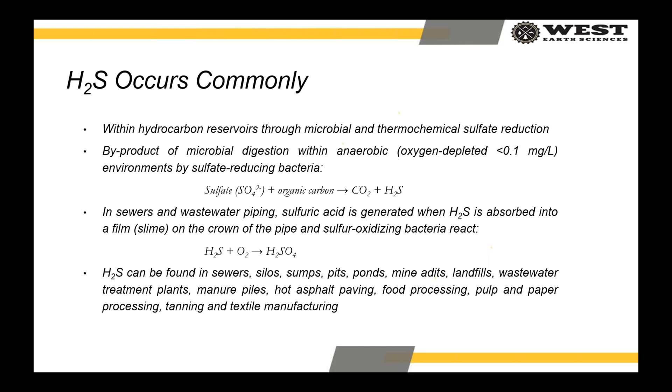So I took a look at the last number of years worth of incidents reported throughout North America, and fatalities in particular around H2S, to give you sort of an idea as to where it might occur. And so you see it doesn't really discriminate against a specific industry. So it can be found in agricultural or farming operations. It can be found within industrial operations. It can be found in rendering applications.

It's very commonly found in sewer applications, whether it's trenching, servicing, cleaning, obviously found in gas plant environments. There have been fatalities that have occurred just in restaurant operations where staff went down to clean out a sewer from a restaurant that was being problematic. You can see it in a variety of tannery operations and that type of thing.

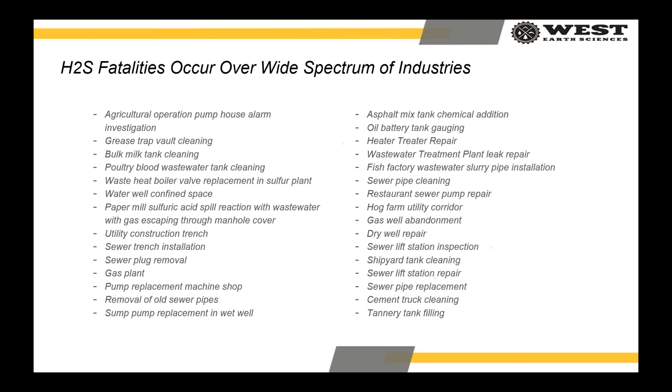So I'm not going to dwell on this list. And when you see the presentation in PDF, you'll get a sense that H2S doesn't really discriminate against a specific industry. So Hendrickson in 2004 did an assessment of about 7 years worth of reporting. So it was not just fatalities. Now, if I just go back to my list here, this is over the last 5 or 6 years in North America. Hendrickson did a pretty comprehensive analysis and published it in 2004. So he looked at 7 years of data.

And of course, in here are some lessons learned for us. So almost 50% of the fatalities really were employees in their first year of employment. And all of us know, as part of a comprehensive safety program, that the most dangerous time for safety is as a new employee performing a new task. So the fatalities were most common in waste management and natural gas processing. Poisoning was most common in sewerage, as well as more downstream in petroleum manufacturing.

And again, at the time, it didn't really look like it was biased towards a particular size of company. So even larger companies had a fairly high fatality rate compared to smaller companies. So it sort of highlights the importance of not making an assumption that if you're a particular size of company and you have a particular program that you can be immune to the risk associated with poisoning from H2S.

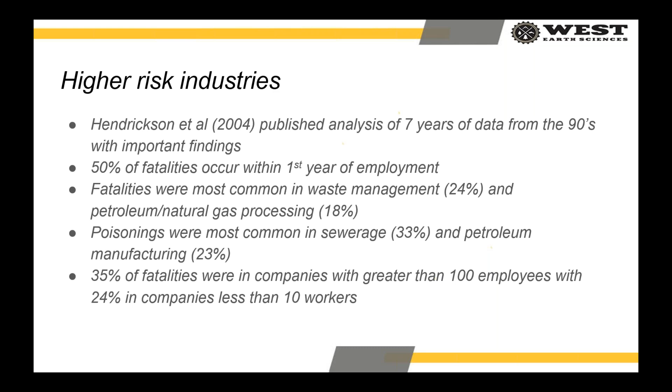So some of the important physical properties, and I'm sure there's a couple chemists on the call that understand this better than I, but it's colorless, it is flammable, and it's highly toxic. And it's of course denser than air. So you remember from your H2S lessons about don't head downwind, downhill in the event of a release or an alarm. So it's very important to understand that because of that density, it's really affected not only by where it's generated, but it's also very much affected by wind speed, changes in barometric pressure, and changes in the configuration of the workplace.

So some of the mining fatalities, if you go on the web and you scan some of the fatalities that have occurred, you'll see circumstances in which workers have gone into mine adits, confirmed that there was not an H2S risk, but during the time period that they were in that workspace, there would be a shift in the barometric pressure, a shift in the weather, and now you get H2S gas flushing through an area that had tested previously clean. So it's very important to understand the impact of denser than air and how it can mean a change in the H2S levels within a particular workplace.

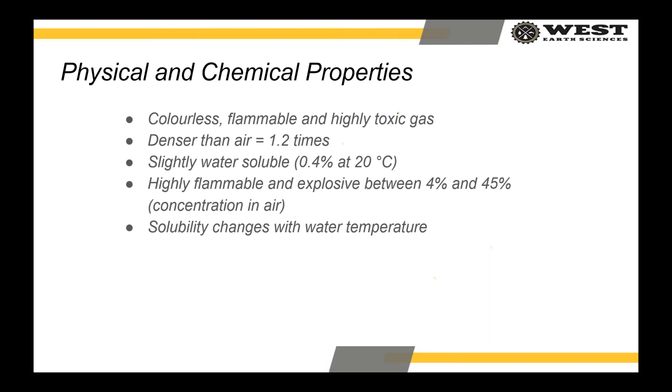Joe, can you see my arrow? Yes, we can. Yeah, very good.

So that affects whether at lower pH, maybe you're trying to remove it, you're trying to bubble it out as a dissolved gas, whereas at a higher pH, you might have to be treating it for the HS ion and use some chemistry. So really, it's important to understand that over a narrow range of pH, you might get quite a change in the behavior and availability of hydrogen sulfide.

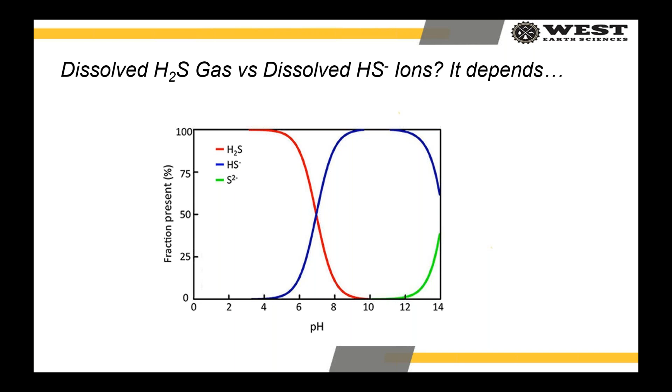So the availability of hydrogen sulfide, if it's a dissolved H2S gas in water, as we saw on this graph, at a lower pH, you get more H2S dissolved. That means at a lower pH, if the water is turbulent, then you might get more bubbling of H2S, making it available. Now, lowering the temperature increases the solubility. So a low temperature wastewater flow would have more milligrams of H2S available than at a higher temperature. And then finally, the turbulence of a flow really affects the amount of H2S that can be released.

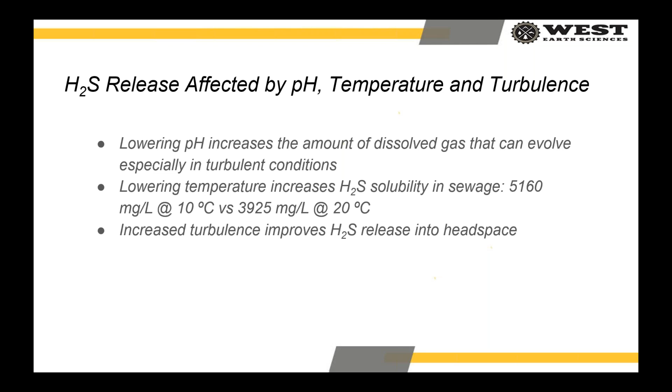So remember, I talked about one of the industry standards for design, and I'm just opening up the book right now, and it's basically 1989, ASCE produced a manual for sulfide in wastewater collection and treatment systems. And so I've excerpted from there an example of some of the types of flow that could cause the turbulence and accelerate the release of H2S.

And so you'll see a variety of configurations. These are biased towards sewerage type applications. But if you look at any industrial piping system, you'll see situations like this can also occur. And so if you have drop structures coming from a process wastewater, or you've got merging flows, all of those create conditions in which you might get H2S release.

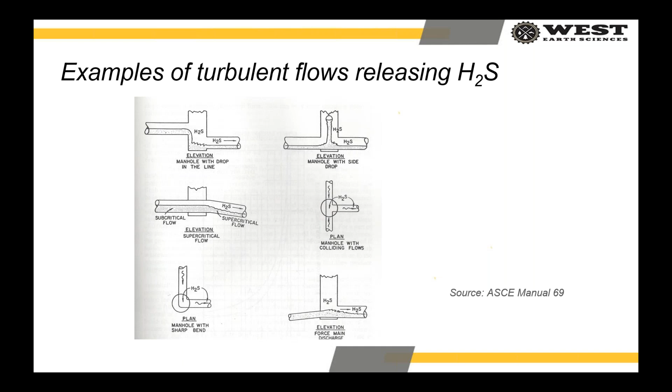And so there's been some good work done and research done, for example, in the city of Edmonton around the impact of major drop structures on the availability of H2S coming out of the water and into the headspace. So it's worthwhile thinking about what are the various action levels that might be in place that are important for the protection of infrastructure, protection of worker safety, and protection of the public.

H2S can be detected at a pretty low level. And I remember working at the Edmonton composter when we had basically a biobed system, sort of a bacterial system outside to treat trace levels of H2S that were coming out of the composting operation. And what we used to detect it was an odor panel, because we found people that could detect levels of H2S at levels that were below what you could measure analytically.

And so you can get an offensive smell at a concentration as low as 0.5 part per billion. So that factors into how much of a risk is there if you have an H2S issue. What's the risk of it becoming offensive and creating a problem for your neighbor or your worker? So always remember that the detection levels are very low. And that's a good thing, because of course the mortality associated with higher levels of H2S is extremely high. And so it's good that some can detect it at a level so low that you can barely measure it through an analytical process.

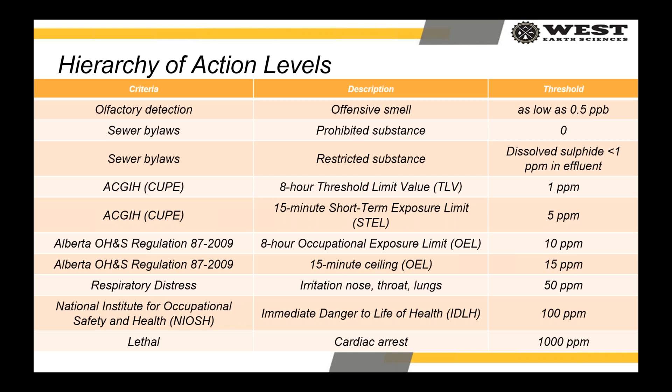So the key considerations for safety are make sure you identify the potential sources, especially organic or anaerobic digestion of organic matter. Think about the downstream conditions that can affect the state of H2S. So for example, if you have a digester discharge at a certain concentration of H2S and a certain equilibrium between the hydrogen sulfide ion versus the dissolved gas phase, and then you blend that stream with, say, a boiler blowdown of a varying pH, make sure you understand how that changes the availability of H2S. Also understand how upset conditions can disturb the equilibrium of the system.

Make sure you have adequate detection. Now, whether that's the workers with a portable device that they're using before they enter into a space that has the potential for having H2S in it, or online real-time monitors with alarms as well. So making a selection of the right detection equipment.

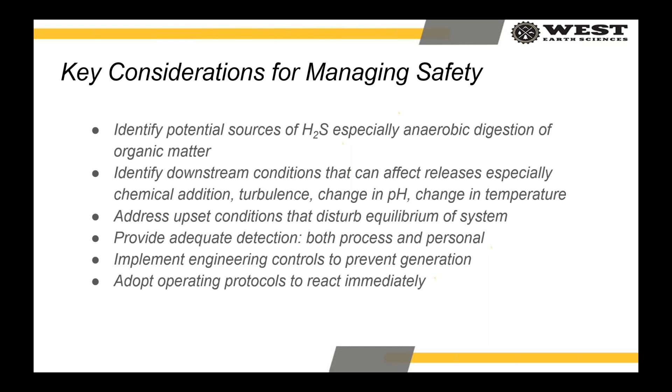And then, of course, and again, I'm preaching to the choir for many of you, the combination of engineering controls to prevent it from being generated. And that can be treatment associated with, for example, your wastewater treatment plant. And then also adopting the operating protocols so that you respond immediately to any circumstance in which there's an elevated H2S, especially with the potential for any worker exposure.

So the treatment options, moving on, really depend on your desired outcome. Are you focused on meeting effluent discharge criteria? So in other words, are you focused on achieving a bylaw, either a restriction or a prohibition? Are you worried about odor generation? I remember decades ago doing some air quality monitoring on one of the large regional wastewater lines because we were detecting odor in a regional line that was coming from one of the surrounding communities in the Calgary region.

Is it an occupational health and safety criteria that you're trying to achieve? And then finally, are you looking at the H2S control to prevent any damage to infrastructure, especially corrosion and degradation of piping systems? And so when it comes time to choosing the treatment technology, you have a variety of options. You can do physical, mechanical.

So in other words, if I've got H2S at a certain pH in a bubble form or dissolved form, am I going to go to some sort of physical process to get those bubbles out? Or am I going to go to a chemical process where I would add an oxidant of some type in order to get the H2S out? Or do I go to a biological process? Remember I talked about a few minutes ago, we used a biological process in the composter in Edmonton to take out any of the odorous compounds. So they were low concentration, but nonetheless still detectable by our odor panel. Or is it a combination of those three processes?

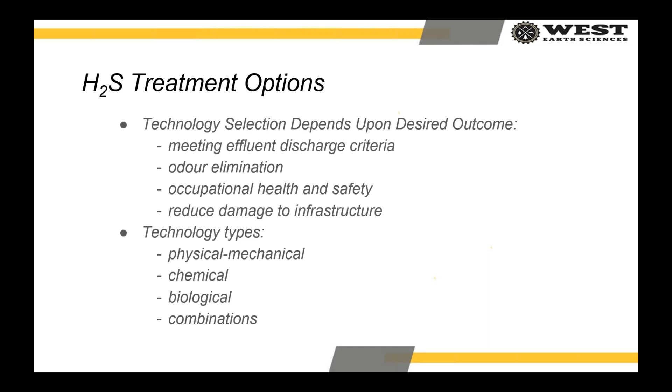Thankfully, I'm not going to go through all of these in a lot of detail on this call. But you can see there are a variety or family of treatment technologies that really are based on whether there's a high volume of flow, whether it's a water or air media that you're trying to treat, or whether there's a low volume of flow. And there are some examples that have been quite commonly shared around Western Canada.

I haven't seen the participants list as to whether there's anybody from Apache and Encana, for example, on the call. But an example of a conventional stripper is the DeBolt water treatment plant in northern British Columbia that was in place to remove H2S from formation water to make that water available for reuse in hydraulic fracturing operations. So that's an example of a type of technology that's really a physical combined with chemical process.

So there's a family of technologies that are available, and many of these, or all of these, used in Western North America. So the selection really comes down to an understanding of the chemistry, volumes, and the ultimate performance target. Some of the performance targets also relate to the perception of the end user.

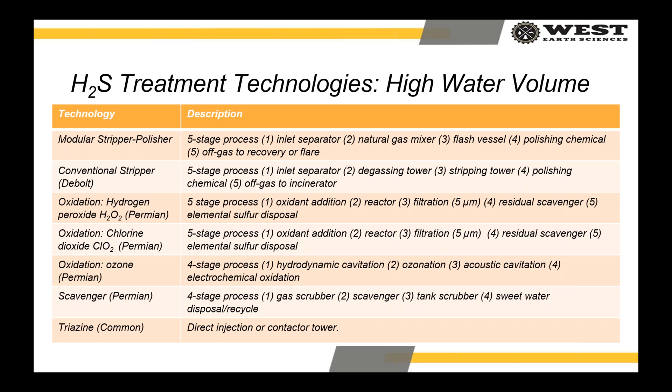So in looking at, for example, hydraulic fracturing water reuse applications, the service providers for the fracturing operations want to see H2S reduced to almost a non-detect level. And partly because of the concern around the perception of safety, and partly because of the need to protect the tubulars and equipment from any corrosion resulting from either an over or under treatment of the H2S problem.

If you go to some of the lower volume systems, and this is something that many of you that are in the municipal sector would be familiar with, you can go to a variety of technologies and chemistry. So chlorine dioxide, sodium nitrate, iron sponge, carbon absorption, for example, is a good example of what's being used in some workspaces where you get only odorous levels of H2S and not higher levels of H2S, scrubbing systems as well. So you have a family of technologies and no single recipe or silver bullet around which technology would be applied.

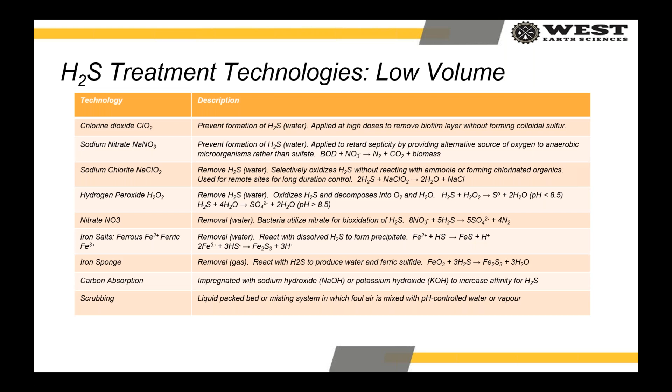I want to share with you some of the systems and the variety of systems that have been used. So for example, I was lucky enough to be involved in the Beverly Hills water treatment plant.

Unlucky that I'm not still living somewhere in that area, especially now that I look at the weather in the middle of winter here.

But at the Beverly Hills water treatment plant, we were seeing slightly elevated H2S due to bacterial activity in the groundwater that was being sourced to treat the drinking water. So in other words, Beverly Hills was reliant on the canal system and surface water for much of its water needs. But the irrigation district, or the water district, subsidized a water treatment plant so that Beverly Hills could draw groundwater and reduce its reliance on the canal water and aqueduct water.

And so in that application, we went to a simple scrubbing tower, pretty compact tower, to basically take the water from the backwashed filter water from our sand filters at the start of the operation and scrub that. What was interesting in Beverly Hills is that this water treatment plant was located in the middle of their office building. So in other words, we had a need to treat levels of H2S inside a water treatment plant that was also a showpiece as part of their office building. And so it required a system that was quite robust and could not be defeated or fail.

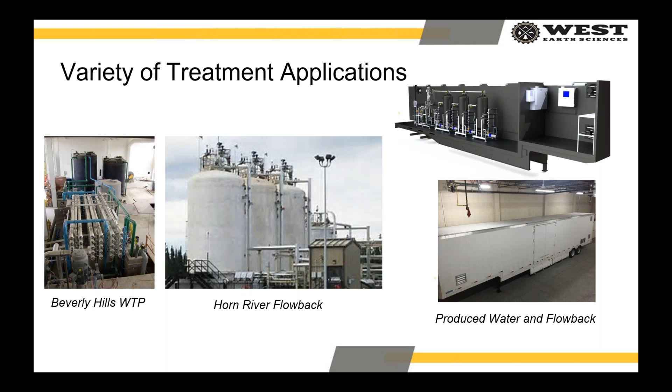For detection, many of you may spend your day with a portable monitor on your person as you go about your daily tasks. So there's a variety of detection methods that really also depend on what's the risk of a release that is at a very harmful level, how quickly do you need to react to that release, and what information do you need in order to take preventive or corrective action.

So we have everything from gas detection tubes, the Gastec or Draeger tubes that some of you may have used over the years, passive sampler badges, electrochemical devices. I know in sewer applications, the OdaLog device and various logging devices are pretty extensively used. And then when you get into more fixed applications like a plant environment in which you have a risk of ongoing exposure, you can go to a variety of real-time systems and logging systems, all the way up to open path laser systems. So you have a variety of detection methods available to you.

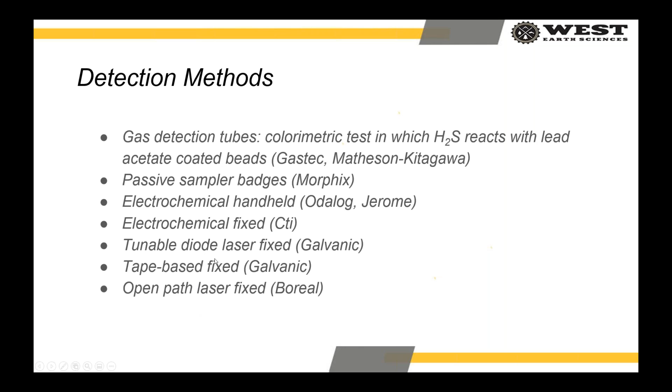So as we start to think about closing this up, and I think, Joe, you wanted to see about 40 minutes or so. So we're just about to the end of the journey on H2S.

There's a number of factors, of course, in being duly diligent in the workplace in addressing this issue and the risk to the public, to our workers, or to infrastructure. Obviously, H2S Alive training, and not just for those that are directly exposed on a daily basis, but those that may be in environments and inadvertently exposed to H2S. H2S Alive training is very critical. And I would say supplement it with a briefing with your team around what are the potential sources of H2S, and what are the types of upset conditions that could alter the risk of exposure.

Secondly, make sure there's engineering controls in place. So do an assessment of the source and the generation of H2S and understand whether or not that could be controlled or mitigated by engineering controls that prevent the release or prevent the downstream discharge. Make sure there's appropriate detection equipment in place as well, both at the personal level as well as at the facility level. And then finally, make sure that there's appropriate personal protective equipment available for the staff. A big part of that relates back to detection equipment and having the right monitor system available as your staff are potentially exposed to H2S.

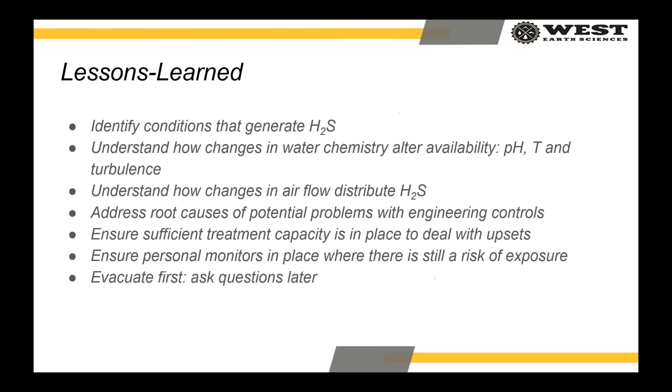So Joe, I think I'll close that off. It's been a bit of a whirlwind tour through the sources, some of the factors around treatment and availability, and some of the due diligence around it. But I felt it was really important to give this team a refresher on the issues around H2S. Because as we know, the most important thing on any day of work is to get home to family, friends, and loved ones, and managing the H2S issues is a key part of that, especially in Western Canada.